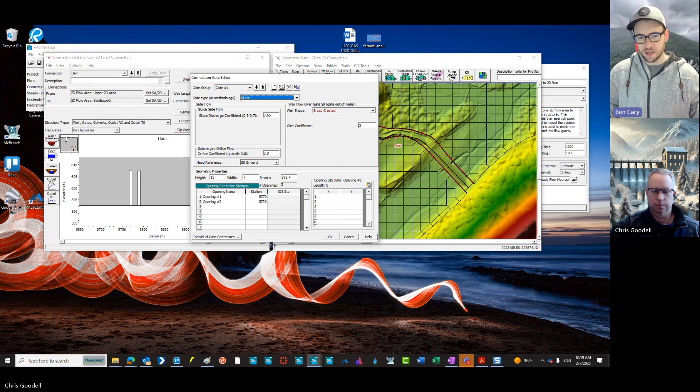Yep. And like always, with these parameters, you can enter in the station, right? But I think you can also customize the exact location of that gate by putting in XY coordinates if you want to modify that. That's right. This is an interesting segue, Chris: with gates, if you look at the gate location along a dam or along a spillway, does it really matter spatially where that gate is located in terms of the impacts downstream?

For the most part in 1D, it doesn't. However, there are some exceptions to that. If you put a gate where there's ineffective flow upstream of it, you're not going to get flow through that gate. So spatially, it does matter in that respect, but otherwise, it doesn't really matter in 1D. In 2D, it definitely matters because the head reference will be the cell upstream of the gate, and the tailwater reference will be the cell downstream of the gate.

And where water is flowing through this structure depends on where you put that gate. So if you have the gates here versus over here, that will make a very big difference, at least in this near field area downstream and even upstream of the dam. So spatially, it definitely matters in 2D. In 1D, for the most part, it doesn't matter where you locate those gates. Good. All right, so let's review these really quick.

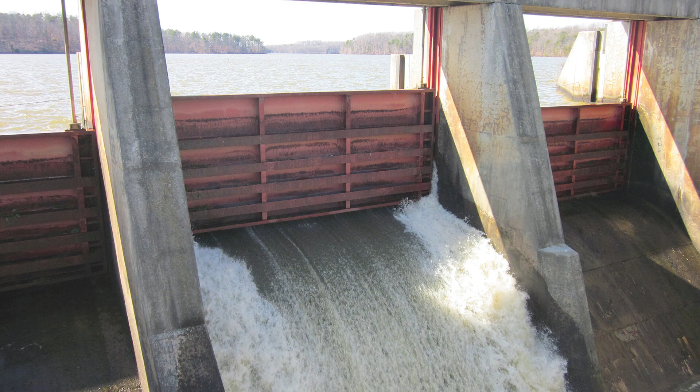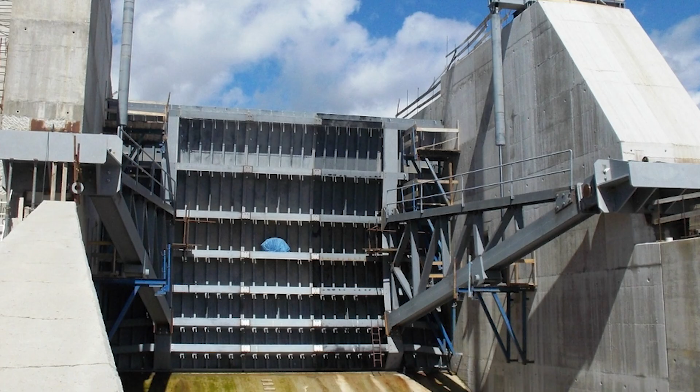Sluice gate is just a vertical lift gate. I'm going to pull open the manual here, and I want to show you the difference. This would be what you call a sluice gate. A vertical lift gate usually has kind of a sharp edge to it, so it's a little more efficient in passing flow through here. That would be a vertical or a sluice gate. And then our other option is radial that I want to show you. A radial gate looks like this. It's also called a Tainter gate.

And here's that trunnion pin I was talking about, Ben. So it rotates. I like radial pin. Radial pin. So yeah, we'll go with trunnion. Well, now we know what that means.

So it rotates around that pin up and down. One of the nice things about radial gates is it gives a smoother contraction of flow in the vertical plane moving through this opening than you get with a vertical lift gate. So these radial gates can be more efficient. One of the other benefits in HEC-RAS specifically is if I look over here in the sluice gate flow pane, if I change that to radial gate, notice I've got a lot of different input parameters here. So you can describe the shape and positioning of this radial gate to inform the overall efficiency of that gate to pass flow. All of these different values will play into that.

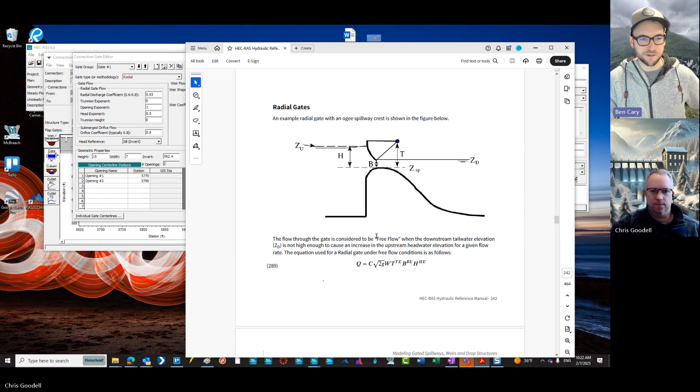And I'll just say, obviously we're not going to have time to get into every single exponent in this equation, but if you have questions about that, HEC has some good guidance on what to use for these different parameters. There's also some additional guidance from the Army Corps of Engineers, and I think FERC might even have some recommendations on some of these equations. So do a little bit of background research before you guess on what those parameters are.

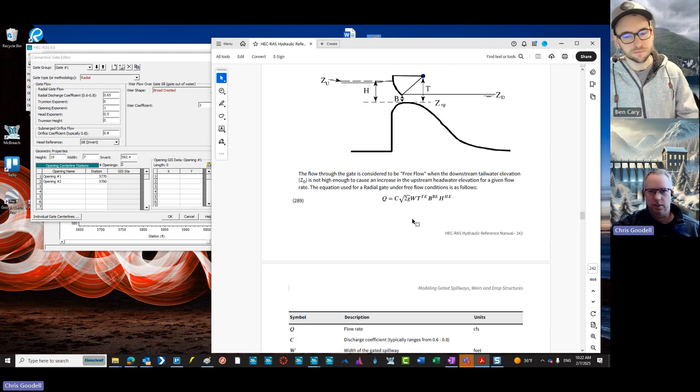And to be quite frank, I usually adopt the defaults on all of these exponents and the trunnion height. If you adopt the defaults, this very complicated looking equation just turns into the regular orifice equation, which is shown right here. It defaults to that.

So the defaults come when you first open it up. So if you just adopt these values, you're adopting the defaults, and it basically simplifies to a nice orifice equation. But it does give you control over that. All right, so

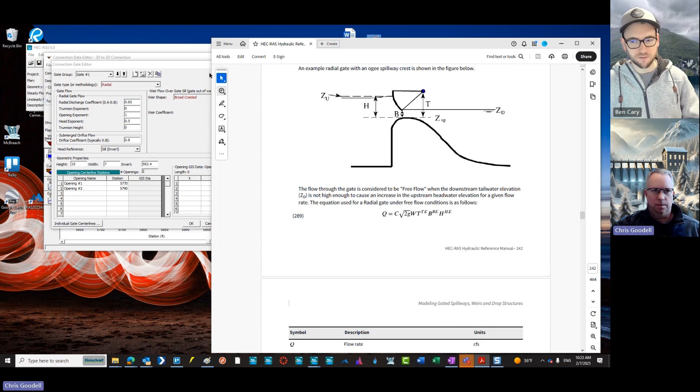Does that hydraulic reference have other gate examples besides radial and sluice? No, it doesn't really get into overflow. I think it has just a brief discussion about it. Yeah, right here. So this is kind of what an overflow gate might look like. You can see this panel can raise up or down, but the water's meant to flow over the top of it. Sometimes you have them hinged and they'll kind of lean over like this.

That would be a flap or crest gate. Sometimes, let's see, you see those with Obermeyer gates as well. So those would be examples of overflow gates. And you can do one where it's just completely open at the top like you see here, or you can have a top to it. So in other words, that water, if it got high enough, it would actually transition back to orifice flow through here if you had a top to it.

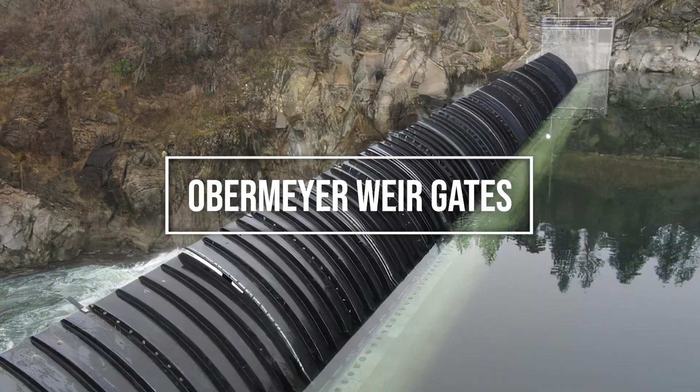Right? And actually that's a really good transition, because one thing I wanted to touch on for folks is we talked about how gates and breaches are the two ways that you can actually make physical changes to parts of your geometry in a RAS model. And so I'm glad you brought up the Obermeyer weir example, right, Chris? Obermeyer weirs are these inflatable pieces of a dam structure that basically inflate to cause an increase or a decrease to the elevation of that hydraulic control.

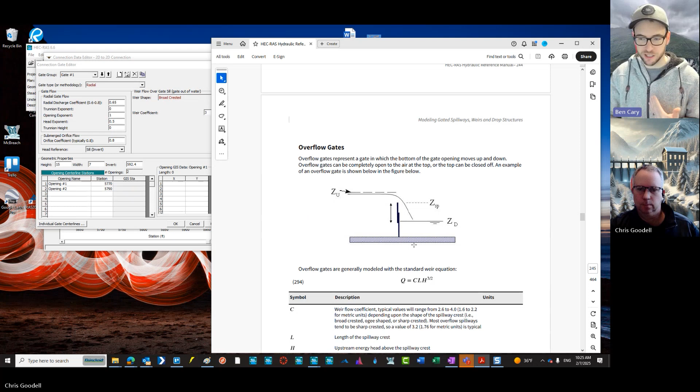And it's kind of tricky to represent that because, when the Obermeyer is completely deflated, it's at one elevation. When it's inflated, it's at a different elevation, but it's really just a flat weir at that point. So actually using gates can be a good way to rough in the functionality of an Obermeyer weir. Even though the Obermeyer weir itself is technically not a gate, using it as an overflow gate could be a good way to represent that.

Yeah, absolutely. All right, so let me give you some description real quick of the parameters listed here. So the ZU, that would be the upstream energy. And when RAS is calculating flow through a gate or over a weir with the weir equation, it always defaults to using the upstream energy as a description of the potential energy available, right? Not the water surface, or I should say the total energy, because the water surface is your potential energy. The energy is your potential energy plus velocity head.

So if you had some significant velocity through here and you measured it to the water level, you would miss out on the extra energy you have from the movement of the water, the velocity. So it's always measured from the upstream energy. Okay. And then the head on this particular opening, in this case we have radial gate flow, is measured from the upstream energy down to either the sill, as we're doing in this case, or to the center of the opening, which would be your other head reference option.

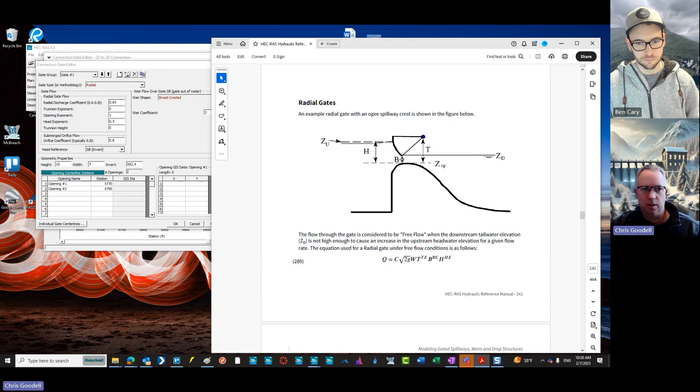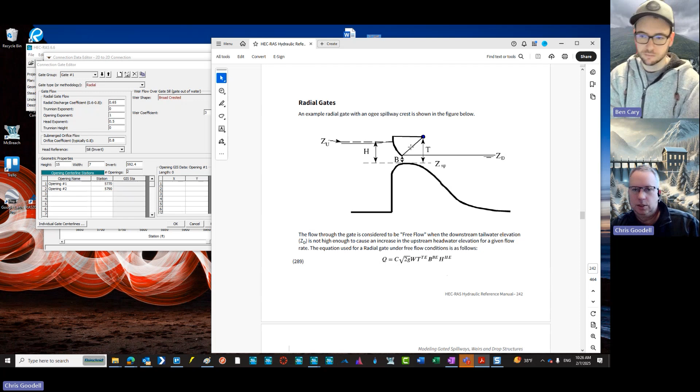Okay. So that only applies when you have what's called gate flow. At some point, this water level can rise up high enough that you have submergence on that gate. And RAS will track this during the computations and will actually switch to a transitionary equation, which you see right here. There are two differences between these two equations. Actually, let me do it with the sluice gate because it's a little easier to see. So here's your gate flow equation. H is measured from the energy either to the sill or to the center of the gate.

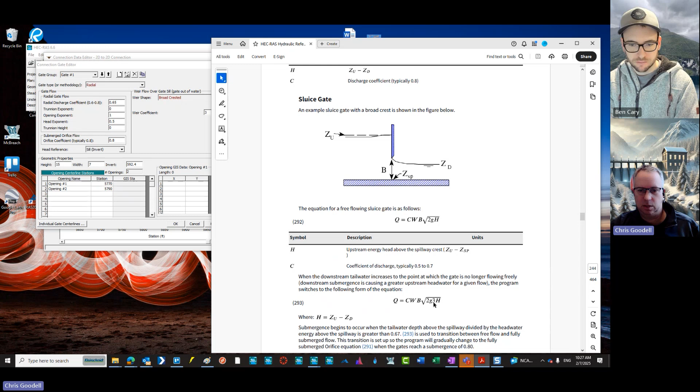Okay. And the transition: once this water level gets up to 67% submerged, RAS will switch to this equation. Notice the only thing different in these two equations is there's a 3 dropped in here. You might be thinking, well, how the heck does that work? How can you have a smooth transition when you've got a change like that, the only difference being this 3 added in here? Well, there's another difference, and that's how H is measured.

Notice here, H is now switched to measuring from the upstream energy to the downstream water surface, wherever that is. If it's up here, that would be your H. Yeah. So as that downstream water surface elevation causes a higher and higher submerged condition, when it switches, your H gets a lot smaller, because it goes from ZU to either the sill or halfway, to now ZU minus ZD.

So it could change drastically. So that 3 actually helps it kind of stabilize a little bit. And that's exactly right. And you can do the math behind it. And if you notice that the transition starts at 0.67, which is 2/3, right? That 2/3, that's where that 3 actually comes from.

So if you do the math, you define these H's in their respectively different ways. You'll be able to see that these actually equate to each other. You get the exact same Q when you have 0.67 submergence. Okay, so it is a smooth transition.

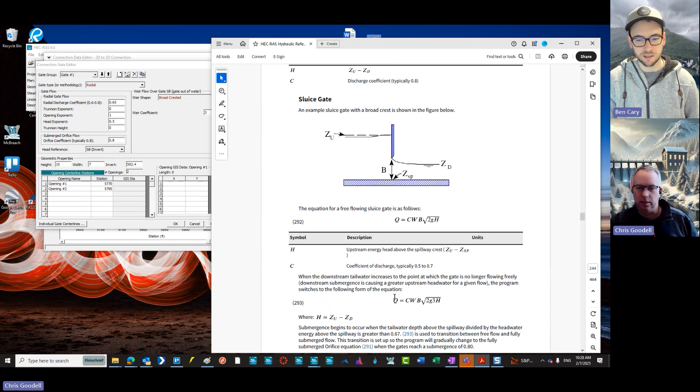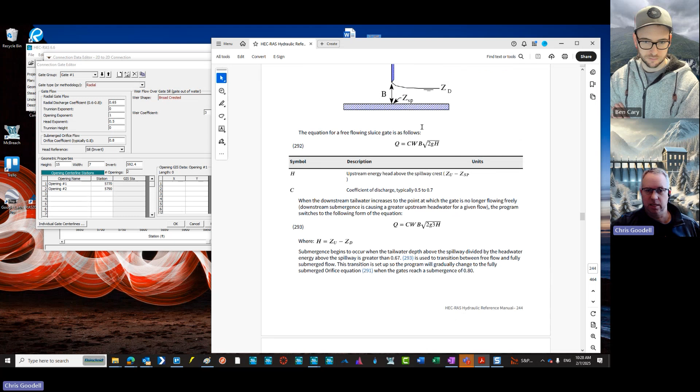And then when that submergence gets up to 0.8, then RAS will switch to the fully submerged orifice equation, which is back to here. Okay, only the H now is ZU minus ZD, not down to the sill or to the center of the gate opening. It's the difference in head between the upstream energy and the downstream water. And you don't have that factor of 3 that helps equate. That's right. The 3 goes away. You go back to this equation.

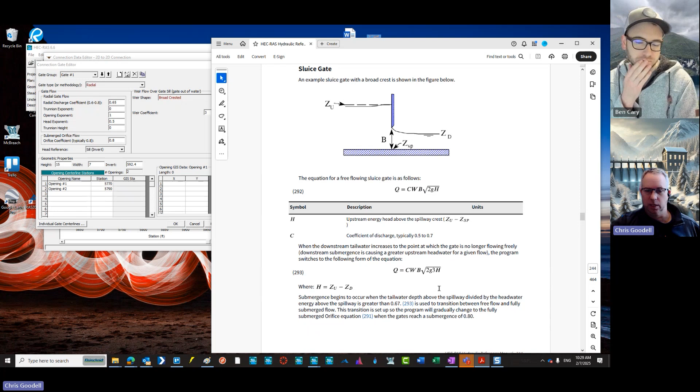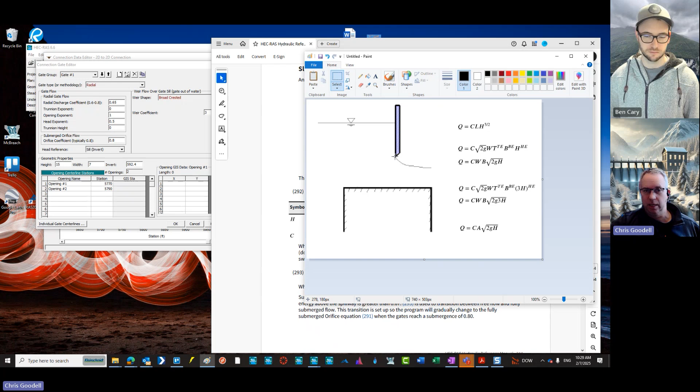Yeah. So let me pull that up here because this gives a kind of a summary of what goes on as water increases. So when water's down here, it's completely under the gate altogether. RAS is using the Weir equation. All right. As soon as the water touches that gate, and really not the water, but the energy, as soon as the energy gets higher than the gate lip, it switches to the gate equation, which is what you see right here.

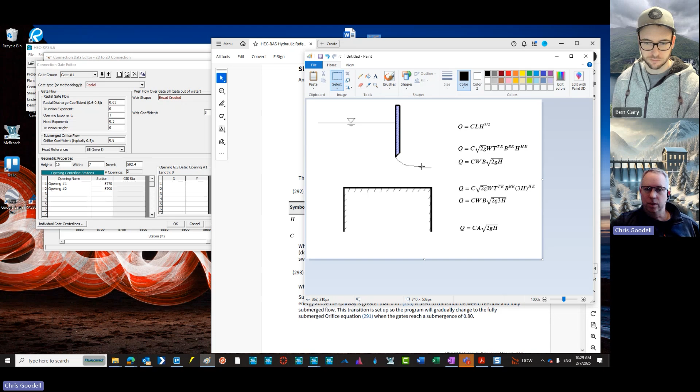The top one is for radial gates. The bottom one is for sluice gates. Okay. Exact same equation. The only difference is the radial has these extra exponents in there. Right. Now, when the water continues to rise up, maybe we get to something up here. Oop, that was really a bad drawing. Right? Let's do it with a line.

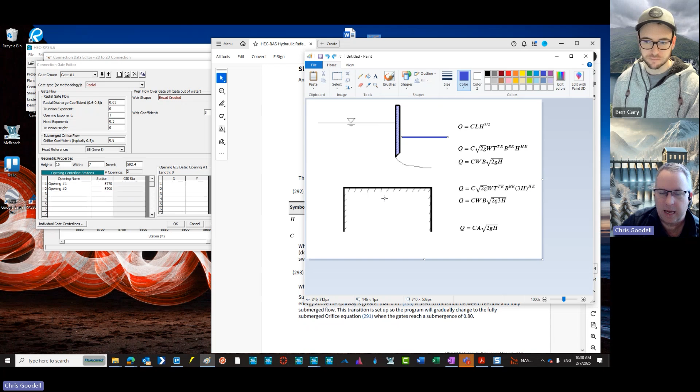Okay, so let's say the water's up here, and this represents 67% submergence. Submergence is simply this depth, tailwater over the sill, divided by headwater over the sill. That's your submergence percentage, right? So when that gets to 67%, RAS will switch to this equation down here. Again, radial gate, sluice gate.

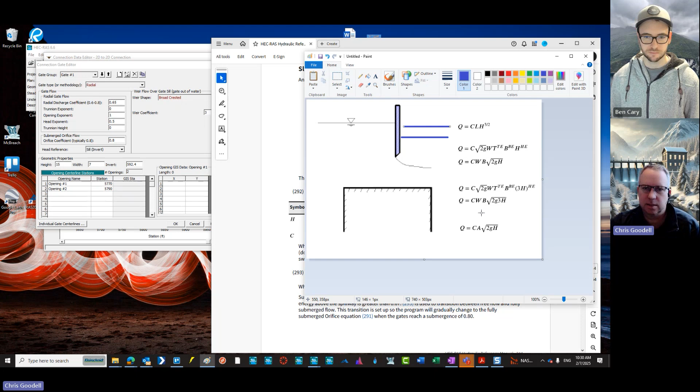All right. Now, as it continues to go up, eventually you get to 80% submerged. That's right, 80% submerged. And then it switches to the basic orifice equation, but the head is measured from the upstream energy to the downstream tailwater. Okay, cool. Yeah, that's the way it works, and that all happens automatically for you in the code, so you don't have to worry about it.

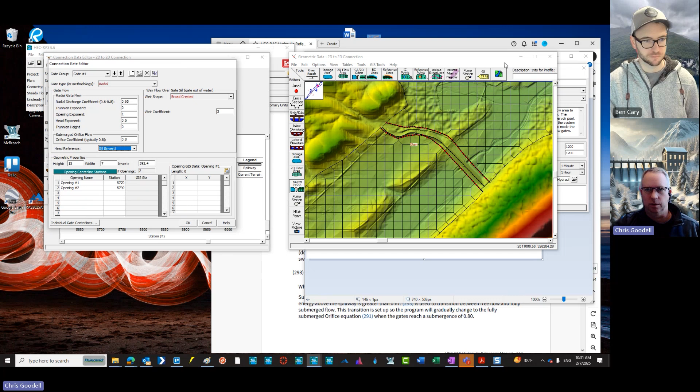But it's good to know because you'll be able to see in the output, especially with 1D, because you get a lot more gate output in 1D, where that transition takes place, whether it's gate flow or orifice flow. And the consequences are for gate flow, it's using what's up here. Let me go back to the sluice gate. It's easier to explain. So gate flow, it's going to use this coefficient, that C value. For orifice, it's going to use this C value.

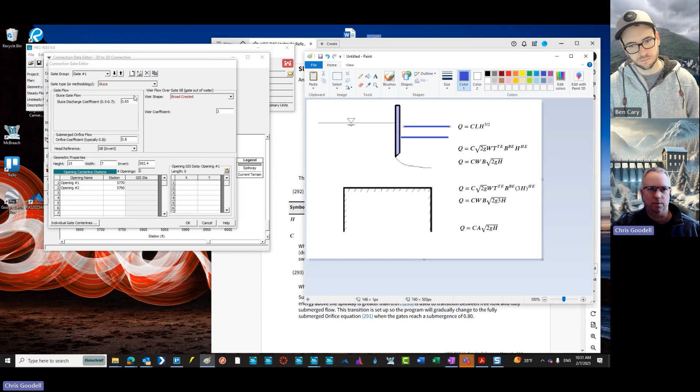Okay, so again, that's another difference. Gate flow, this C is taken from this input box. For orifice flow, well, for the transition as well, it's using this one. But then when you get to orifice flow, it switches to that. So they probably should have maybe a C sub O there instead of just C to distinguish that it's a different C factor. Same thing with H. Yeah, I agree. It would be a little bit more easy to understand because the actual definition of H changes when you go from here to here.

Yeah. So that's a little bit of a description on how the equation changes as water surface changes. But I know, Chris, you said that you wanted to talk a little bit about the head reference and how that connects to the equation. Yeah. Okay. So notice over here with the head reference, I'm going to get this window out of the way here.

You can actually measure your head reference only for gate flow. This only applies to gate flow. You can measure it to the sill, which is where the gate will touch the structure. So this is the sill right here. Or you can measure it to the center of the gate opening, halfway between these two, right? Of course, that's going to change if your gate's opening and closing throughout the simulation. The center of the gate opening is going to change. So RAS will have to recompute what that H is every time.

But let me explain my thoughts on this. All right. So there is a pressure distribution vertically, right? If we represent that with a line here, let's do a red line. Oop.

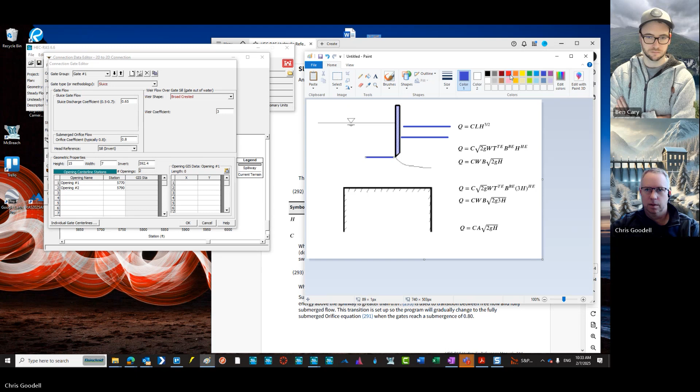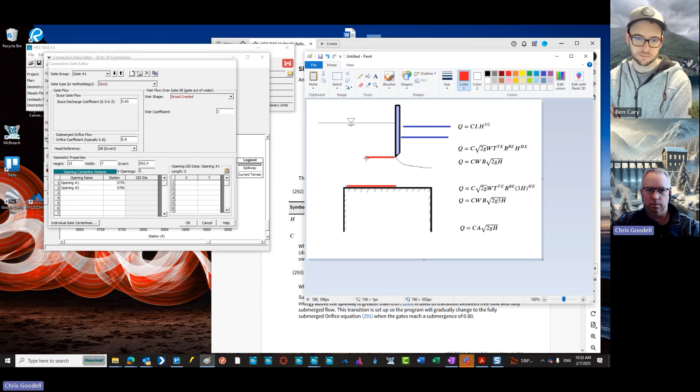All right, I'm going to do a new line. And we're going to make a red one right here. Let's say that represents the magnitude of the water pressure at that depth, right at the gate lip. Okay. What about down here, Ben? Is this going to be more pressure or less? Yeah. So that's going to be something like this maybe, right? And so if you connect these two, you've got a sort of pressure distribution with depth. Yep. Okay.

Forget about that. Okay. So you can see that distribution changes. Now, if we take the head reference from the energy grade line down to the sill, we're using this pressure here, but we're assuming that it's that equal pressure all the way through the vertical water column underneath this gate. So you're going to overestimate the efficiency of that gate to move flow through, right? Yep. What if we measured it up here? Well, we'd get a different answer and we would underestimate.

This is a linear change in pressure, right? So you can take a straight average between these two and come up with a better representation of the efficiency of this gate to pass flow, and that would be the center of the opening. So why do you think the center of the opening isn't the default setting for HEC-RAS gates? Well, I can tell you a little history behind this.

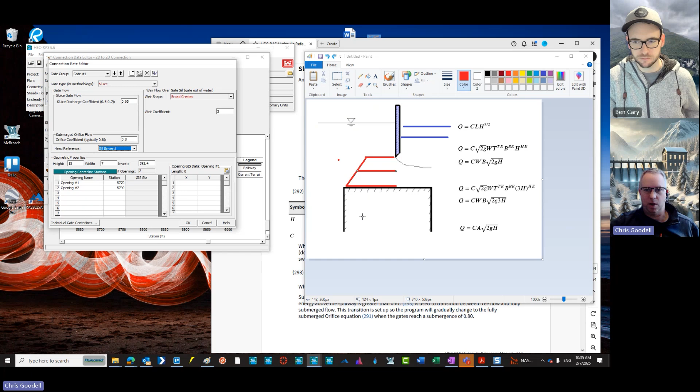If you read the manual, it seems to suggest that if you have a kind of a perched, like an OG spillway type of situation, that you can use the sill. Okay, I don't necessarily agree with that. I'm either missing something or I don't think that's entirely correct. I mean, just the math is pretty straightforward here, and to me, it seems like measuring to the center of the gate opening is always going to be the better option.

Now, there may be situations where you have a really deep gate and a relatively small opening where the sill might essentially give you the same answer, right? Yeah. But the center of the gate opening is still theoretically more accurate. So unless there's something I'm missing here, I recommend that you use the center of the gate opening. Cool. That was a great discussion, Chris, on the geometric aspects of gates, some of the math theory behind what goes into these equations and how that might impact the parameters or selections that you make.

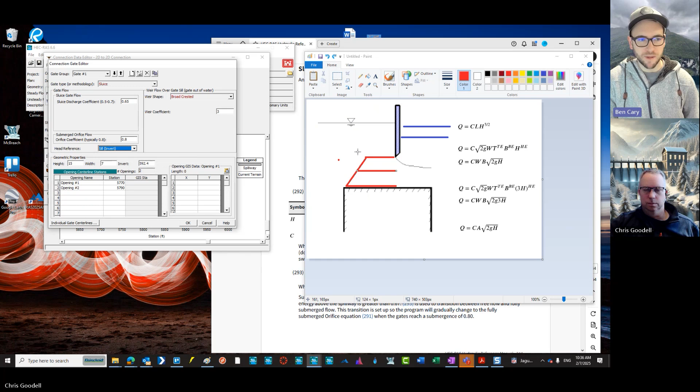What about the actual operations of gates? We haven't talked about how you implement these gates moving up and down, what you set their initial opening to. How is that done? Yeah, that's a great question, and I was just thinking about that, so I'm glad you brought it up. So what we've been talking about up until now is just the geometric properties of the gates and how the theory works behind them. But to your point, Ben, how do we actually operate these during the simulation?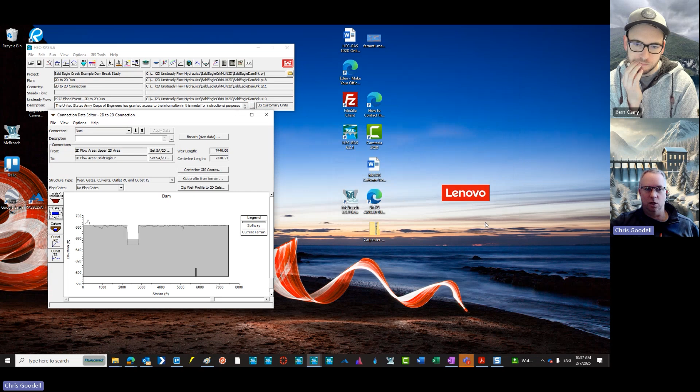And you brought this up at the very beginning, that this is one of only a couple ways that you can change the geometry of something in RAS during runtime, right? And so how do we do that? Well, that's done in the unsteady flow editor. So let me close the gate. I'm just going to close that as well, and we'll go over to the unsteady flow editor.

Notice here that RAS automatically recognizes I have a gate. And so it's going to require me to put in a boundary condition to tell it how those gates operate during the simulation. Now, when you click over here, you can see your options available here: time series gate openings, elevation control gates, and rules. Now, if this gate was in a 1D model, I would also have navigation dams available to me, but that's not available for 2D.

All right, so the first one, time series of gate openings. Pretty simple and straightforward. Basically, you just tell RAS for the entire simulation, what is the gate opening? And you can define that by a data time interval. In this case, we've set it to 1 hour. So every hour, I can define the gate opening, and RAS will just interpolate in between that hour down to the time step level.

So, let's say you probably never would, but for the sake of discussion here, you had a 30-minute time step. Then at the 30-minute mark, RAS would set that gate to 2.5. And then at the 1 hour mark, it sets it to 3, right? So it does linearly interpolate in between. So you just specify for the entire simulation what your gate opening is.

Sometimes we'll just have a constant gate opening throughout the whole thing, and that's really easy to fill this out. You just use the same value. Another common approach is if you add a gate into a project and the gate's closed during the simulation, you could just set that gate opening size to 0. But you do need to specify an opening size.

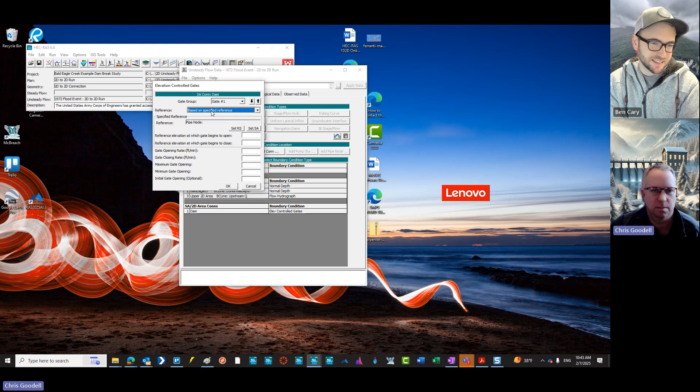So I don't know why it comes up and says pipe node here. That's kind of strange. I don't even think there are any pipes in there. I think that's a bug. But if you go and set your reference, in this case, we don't have river stations because this is a 2D model. So I would set it to the upstream 2D area. Yeah, and you'll notice that's another kind of relic from old RAS. It says set storage area before the 2Ds, but that is how you set the 2D area as well.

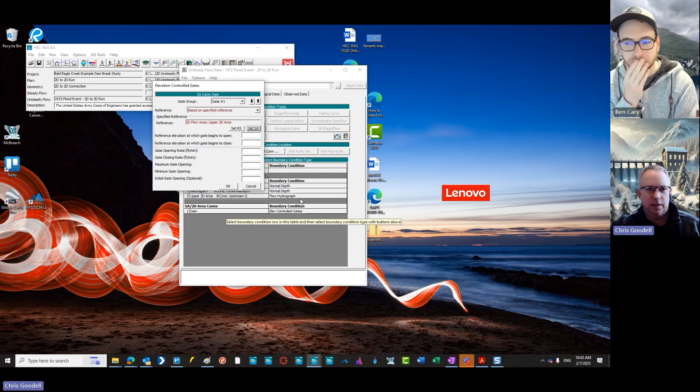That's right. So what cell does it actually use? Well, these gates are right here, and you can kind of see them if you zoom in. So RAS is going to use the cell upstream of that gate. It's not going to use a cell over here. It's not going to do an average. It's going to use the water surface in this cell where those gates are as the head reference here.

Okay, and then you say, all right, when the water level gets to this value, I want you to start opening the gates. And when it gets to this value, I want you to start closing the gates. So usually this is the higher of the 2 values, because when you get to a higher level, then for flood control, you'd probably open the gates so you can release more water and bring that level down. But then if the water keeps going down and eventually gets to this level, then you might want to close the gates to bring the pool back up. And so that's how that works.

And then you have control over how quickly the gates open and how quickly they close. And you can also force a maximum and a minimum gate opening, and even tell RAS where to start at the beginning of the simulation.

What's funny is if you did this elevation controlled gate, just like what you're stating, Chris, you could actually basically fake in a piping dam breach failure. Because you basically model the breach occurring as though it was a gate opening, based off the elevation at which the water surface gets to and the rate at which that piping failure occurs, right? So the breach would grow differently, but maybe that's what you want.

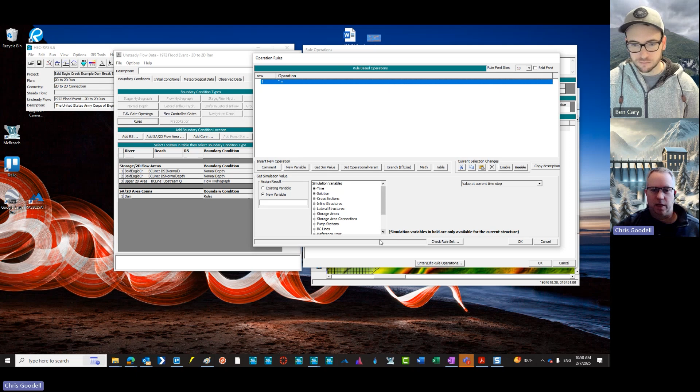Yeah, that's what I was looking for when I opened up this storage area here. If you notice, I expand this, oh, here we go. Oh no, that's lateral structure. Sorry. Expand this. I don't see anything about an individual cell. I see water surface, net inflow, total area volume. So I think you're on the right track there, Ben. You'd probably want to use a reference point.

IC point, probably a reference point. Reference point. Yeah. Then you would drop that wherever you want to reference it to, and then you just pull out the elevation there and make decisions off of that.

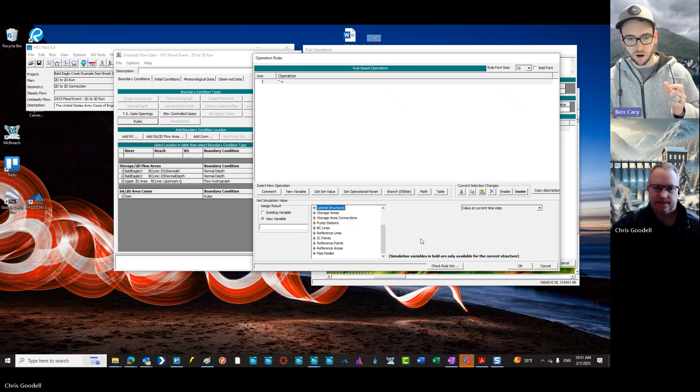As a reminder, reference points and reference lines, for those that aren't familiar, are basically just featureless lines or points that you place inside of a 2D mesh, and you can extract results from them. So you can get a stage hydrograph at a reference point, or you can get a flow hydrograph across a reference line. So it allows you to kind of extract results from a 2D area, and I think that's why they've coded those in as opposed to extracting information from a particular cell.

The other nice thing about doing that with a reference point as opposed to a cell is if you make some modifications to your mesh and all of a sudden your cell numbers change, you don't have to go back and figure out, wait, which cell now am I wanting to reference for my gate operations? Yeah. Always just going to use that same reference point.

That's a really good observation, Ben. I bet you're exactly right. And it's like, why would we set it to a cell when that cell can actually change shape or location or the numbering or whatever? So yeah, that's a good point.

So there I've just added a reference point by clicking on this button and then just dropping it right there. Now I got a reference point, and now when I set up my rules, I can reference that reference point.

Yeah. Awesome. Well, we're just about out of time, Chris. I did want to close the topic here with a question. And we didn't talk about this, so no worries if you don't have anything off the top of your head. But I talked about the example of using gates to represent an Obermeyer weir. That's a little bit of a unique setup, right? It's kind of forcing the program to handle a unique project type. Have you had any other examples in your career where you've used gates for non-gate modeling, if that makes any sense? Gates for non-gate modeling.

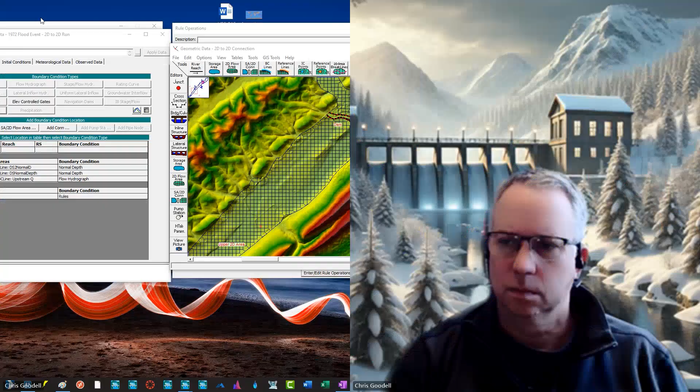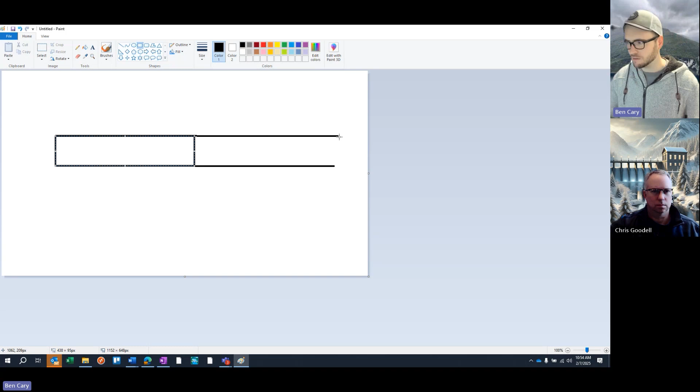And so one of the limitations is you can't add gates on top of your weir crest elevation. So what we had to do is we artificially increased the elevation of our dam crest to the highest point that Obermeyer weir would inflate to. So we treated this like our weir crest elevation. And then we added in multiple, I think it was either 2 or 3, long, skinny gates that had almost no distance in between them, so there wasn't any ineffective flow here, more or less.

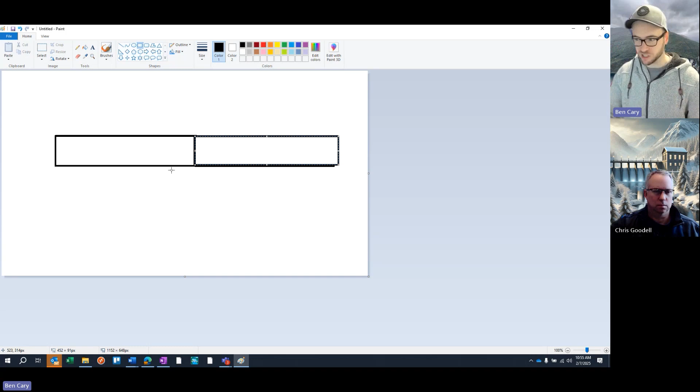And this allowed us to basically treat these as vertical lift gates that would start out as fully open, quote unquote, right? Fully open meant basically we were simulating those Obermeyer weirs being completely deflated. And then as the Obermeyer weirs would inflate, we would close those gates by that same amount to more or less result in the new crest elevation of our dam being equal to the top elevation of that Obermeyer weir.

And sometimes those Obermeyer weirs can be split up into multiple sections, and so you could base your gate size on what those sections are. So it's a little bit weird if you go to look at the dam, you're like, wait, that dam has the wrong crest elevation, but we were again using gates to do a better job of representing that. Yeah, and I would say an alternative to that would be to use the overflow gate, where you could keep the crest at the correct elevation.

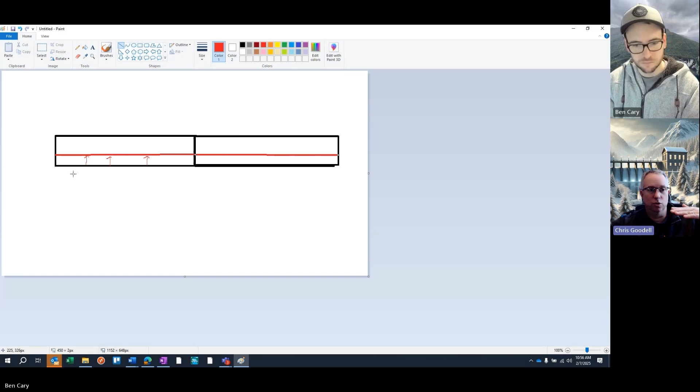Sure. And then the overflow gate fully open would be laid down flat on the crest. Sure. Yep. And then as you close the gate, it actually raises up like an Obermeyer does. So that would be another way to do that. Yeah, totally different ways to skin a cat. But this is what I meant when I talk about being really careful about thinking through what my elevation opening means in terms of the size of the inflation height of my Obermeyer or whatnot.

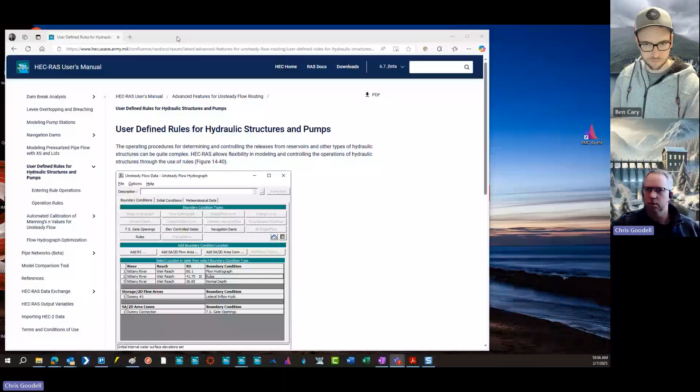Before you close out, I want to share with everybody really quick. If you're interested in using rules, if you just go to the user's manual, you can search on it here, user defined rules for hydraulic structures and pumps. And there's a brief write-up introduction of that. Oh, Stan's done an episode. Nice. And there's a video from Stan on how this works, which I would highly recommend you watch. Stanford Gibson puts out excellent videos, by the way, on how to use RAS on a variety of different topics.

And then if you click on here, entering rule operations, it walks you through the process of setting this whole thing up and how you build your script inside of the rules editor. So highly recommend checking this out. Again, it's called User Defined Rules for Hydraulic Structures and Pumps. And you can just go to the HEC-RAS Users Manual and search on that.

You'll find it. Yeah. And I'll go back to one of the things that Chris and I like to beat over and over again in our classes. And that is, whenever you're doing RAS modeling, you want to start simple and then add detail where you need it, right? So when you're doing gate modeling, my recommendation would be don't jump straight into rule scripting. Set up your model with a very simple operation of that gate. Make sure your model's working, that it's functioning, that it's stable.

And then if you know that you need some additional nuance and control, transition over to rules. It can get you in a little bit of trouble if you jump straight in, because you might not know, is it a rule that's causing my issue or is it something else in my model? Yeah, and that's a good point, because rules are pretty tough to troubleshoot. If it's not working the way it's supposed to, you've got to figure out where in your rule script you've got it wrong. And then you've got to look in your output and see, okay, why am I getting a wrong value here? So there is a way to actually look at the result of the script, but you have to dig around to find that. Yep. Good stuff.